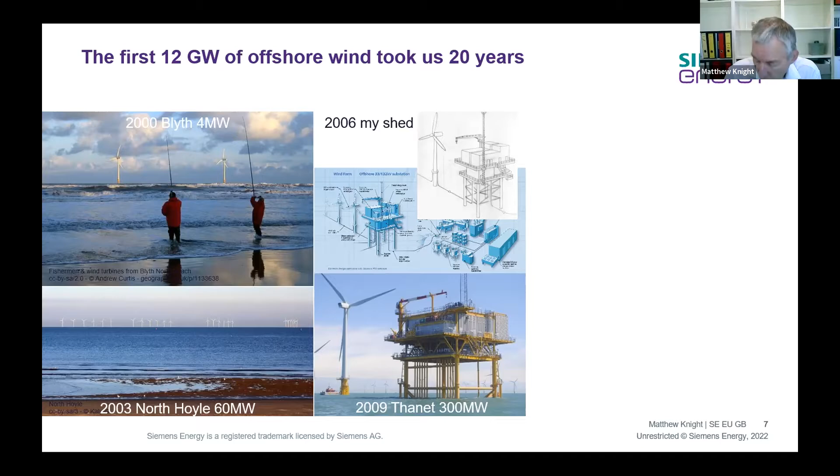But within 3 years, we started to build them, and somebody conveniently took this photograph from nearly the same angle. The industry's come a long way since then. We've built a lot more substations and a lot more wind farms. And I'm particularly pleased with this image here, which shows not 1, but 5 substations under construction at the same time in the same shipyard for 2 different projects, 2 for Triton Knoll and 3 for Moray East. And as you can see, the scale of Moray East means that we're now into gigawatt scale offshore wind farms.

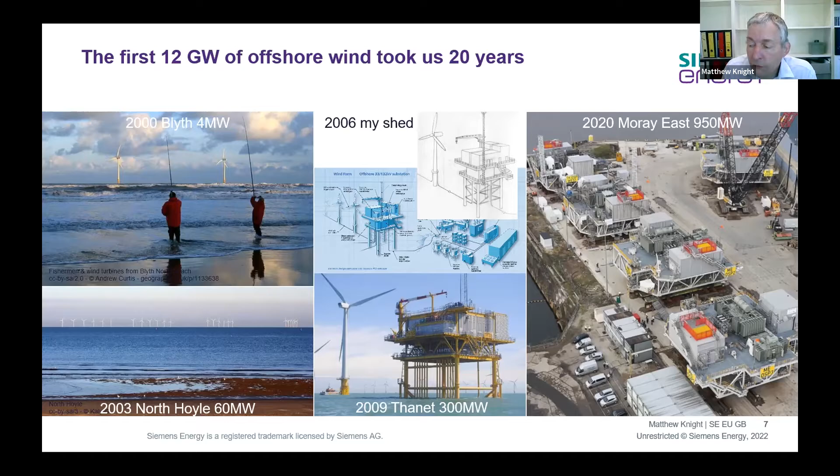So while we were building the wind farms, we were also building the industry that's going to deliver at the scale that we need to do these things. The substations got smaller and cheaper, and we built more of them. And we learned lessons, and a lot of new people joined the industry. There was a report earlier this week that shows 31,000 people now work in the British offshore wind industry. And that number is expected to rise to 100,000 by 2030. So in that context, the idea of doing 4 times as much in half the time as we've done already to hit that 2030 target begins to sound a little more achievable.

And it depends on supply chains for everything. And I was lucky enough that the best day of my working life was the day that I was the face of Siemens Energy when we announced that we were going to open the blade factory in Hull to make wind turbine blades for offshore wind farms. If you ever get the chance to go to a city and announce 1,000 jobs, I can really recommend it.

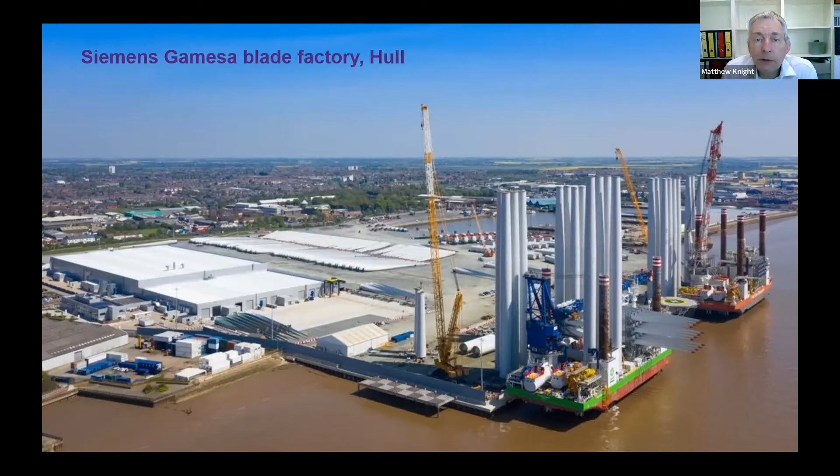But making investments like that required confidence that there was going to be a pipeline of work. And that involved a strong collaboration between government, between our customers and Siemens, or now Siemens Gamesa, in order to make that investment happen. And similar kinds of things have to happen in every part of the supply chain. But there are investments that pay off. This is a photograph from last month showing that we're now doubling the size of that factory so that it can manufacture even larger blades and support the growth of the offshore wind industry.

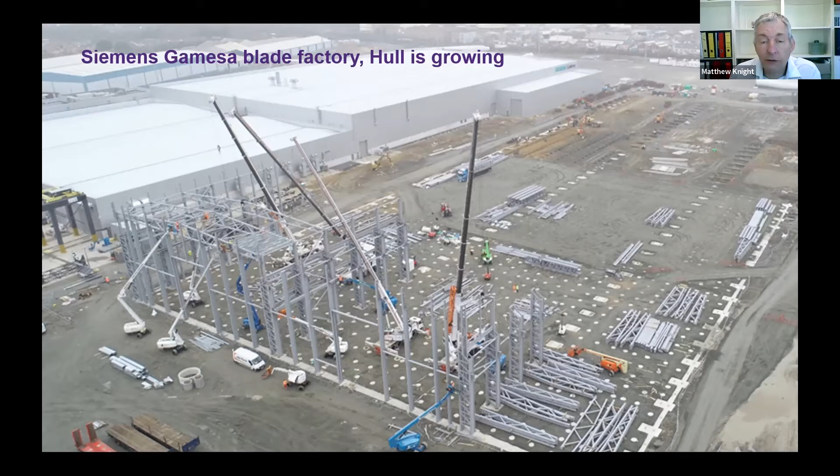We also need to double the size of our electricity system, and we need to invent whole new industries of a similar scale for carbon capture and storage and hydrogen production. And we need to do massive things for domestic heating. And all of those industries will need their supply chains, and they'll all need to grow in parallel at the same time. And that's what the energy transition is all about.

dispatchable generation. And there are 3 basic ways that you can deliver dispatchable electricity generation. If you start with a fossil fuel, you either have to clean up the emissions on the back end of your generator, or you can treat the fuel before you put it into the generator, capture the carbon dioxide, and make a fuel like hydrogen or hydrogen-based synthetic fuel. Or you can avoid the fossil fuel altogether, and you can use even more of that renewable electricity and water to make hydrogen and hydrogen-based fuels and put that through gas turbines. So we're moving away from the idea that we were storing energy as lumps of coal or gas in reservoirs into a world where we have to make and then store and then convert the energy when we need it.

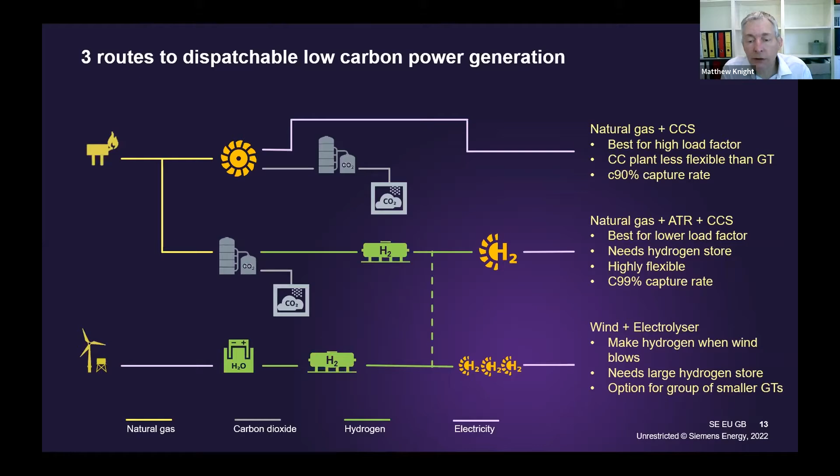And carbon capture and storage is absolutely essential if the UK is going to get to net zero. The Committee on Climate Change have said we just cannot deliver a net zero economy without large-scale carbon capture and storage. But it's not a trivial thing. It comes in big projects and it involves a lot of energy.

If you want to put carbon capture on the exhaust of a power station, you end up using somewhere between 5 and 10% of the electricity generated by that power station just to operate the capture plant, to capture about 90% of the carbon dioxide. And then you've got to bury that carbon, lock it away forever.

And if you can visualize trying to push a beach ball to the bottom of a swimming pool, that's the kind of thing that is involved in putting carbon dioxide at such high pressure that it might almost be liquid, a kilometre or more below the seabed. Excuse me.

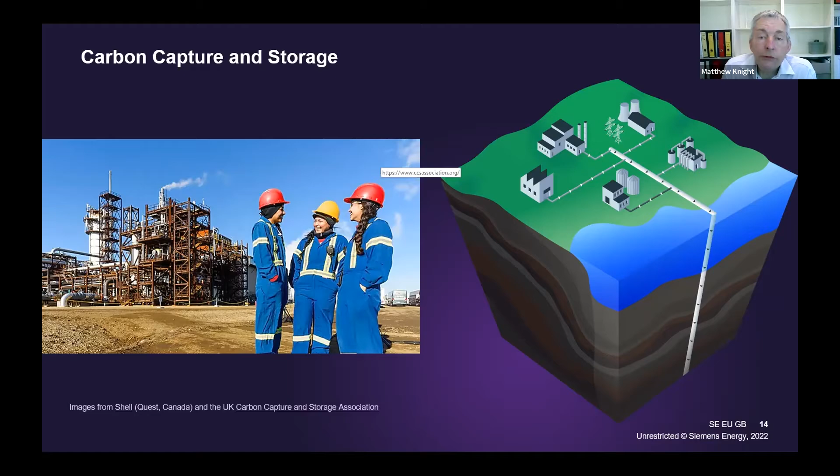But the UK has to do carbon capture and storage, and we are going to do it. And the first two carbon stores have been selected, one that will serve the Mersey area and one that will serve Teesside and the Humber. And there are 47 capture projects going into the first round of funding that will be putting carbon into those stores. And some of you might have seen that yesterday a new round of carbon storage was announced.

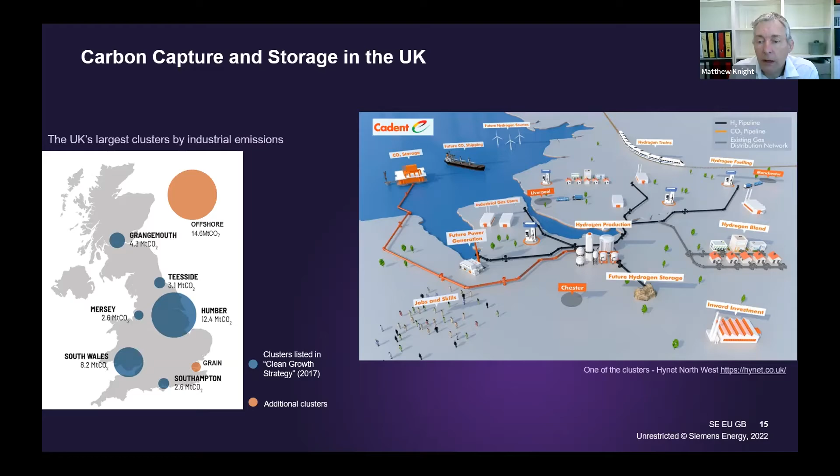So we're going to be burying carbon dioxide, and we're going to be using some of that to make large quantities of hydrogen. And we will need large quantities of hydrogen. This is a 9000 HL, which is a large gas turbine. We've just commissioned one at Keadby 2, which is an SSE power station on the banks of the River Humber. Keadby is the most efficient power station in Europe, and it runs on natural gas.

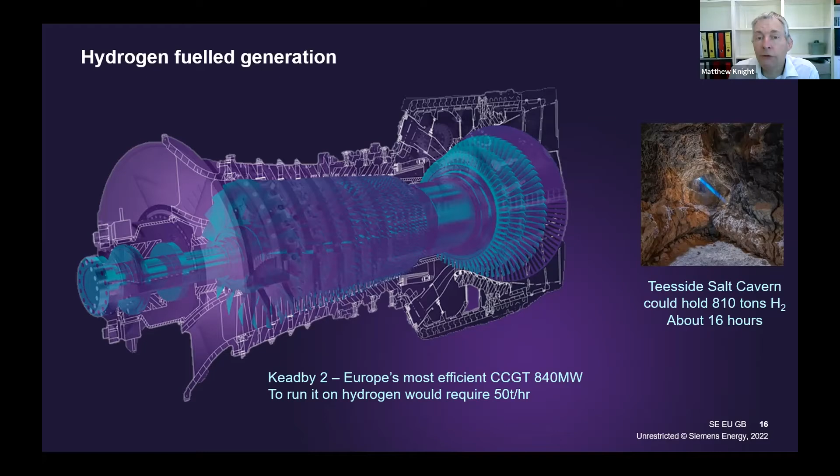If we wanted to run it on hydrogen, we would need about 50 tons of hydrogen every hour. And 50 tons of hydrogen, if you filled one of the salt caverns on Teesside with hydrogen, you'd be able to run this gas turbine for about 2/3 of a day. And that turbine is capable of producing maybe 1% of the electricity that we're going to be requiring in our net zero electricity system by the middle of the next decade. So you can see we're going to need a lot of hydrogen and a lot of dispatchable power.

We can make hydrogen in two different ways, and they're colloquially called blue hydrogen and green hydrogen. And although the product is similar, it's low carbon hydrogen, really they're two almost completely separate industries. Blue hydrogen is much more like the nuclear industry, whereas green hydrogen is more like the solar industry. Blue hydrogen comes in large autothermal reformers, big chemical plants. It needs to be attached to a carbon store, and it produces in bulk and is going to be located very close to where it's needed.

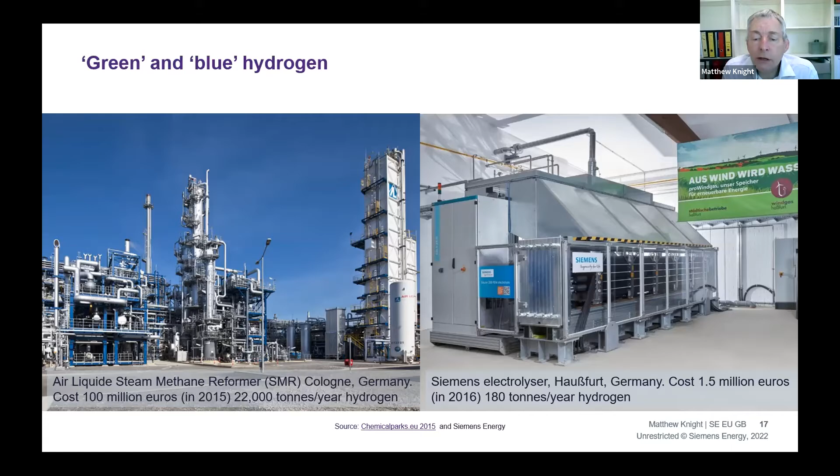Whereas electrolyzers these days are about 1 megawatt, but they're rising, and we'll see those get larger, and they can be spread all over the place, and they can be built relatively quickly. And that's important because the green hydrogen industry needs to grow by about 4 orders of magnitude this decade. So it's not 4 times, that's 4 orders of magnitude, 10,000 times. But we think we can do it.

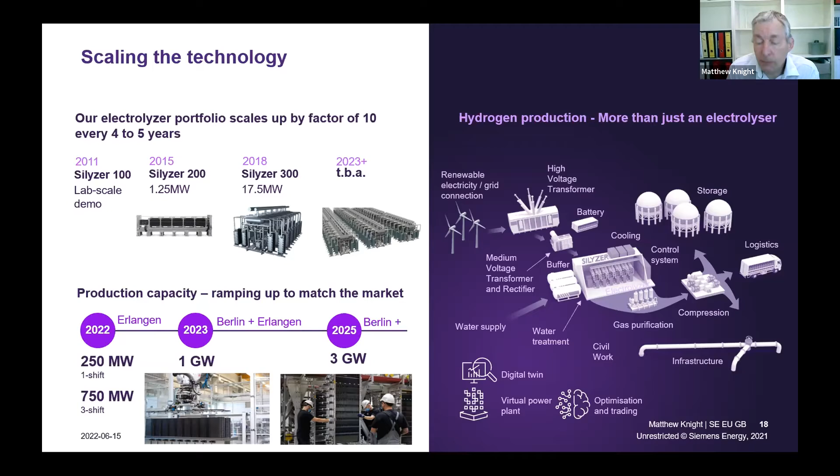The scale of the electrolyzers that we make in Siemens Energy has gone up by a factor of 10 every 4 or 5 years. Our production capacity this year was 250 megawatts. By 2025, it's going to be 3 gigawatts a year. And there's a whole range of other things alongside the electrolyzers, compressors, water treatment, and the electrical infrastructure that goes with that also needs to ramp up as well. And we're starting to see larger and larger projects.

Now, I've hit you with a lot of different technologies there, and often the advocates of one particular technology tend to talk about it like a silver bullet, or the press like to set one technology against another. So, will it be green hydrogen or blue hydrogen? Will it be hydrogen or heat pumps? Will it be nuclear or carbon capture and storage? If we're going to deliver a net zero electricity system by 2035 and a net zero economy by 2050, we're going to have to do all of them at scale, and we need to start very quickly.

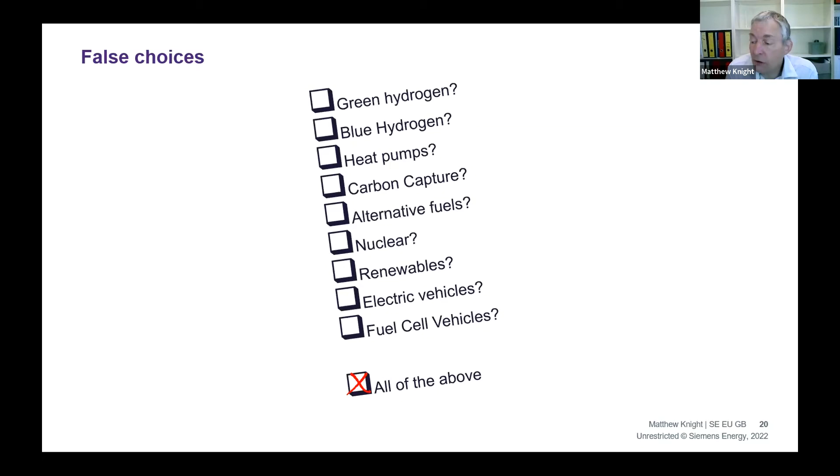Now, if that sounds too big and too scary, and maybe you can't see how it applies to you, here's a little hierarchy that you can use when you're looking at your own business and your own line of work. How can you contribute to meeting these targets? And the first thing to do is to stop adding to the problem. It's verging on the criminal to be building something today that you've got to decarbonize in a few years' time. So we need to start putting in things that are ready for decarbonisation, even if they're not operating in a low carbon way today.

Energy efficiency is really vital. Using less doesn't get us to net zero, but it does buy us a lot more time. What matters to the planet is the total amount of carbon dioxide and greenhouse gas that we emit. So getting our energy in a more efficient way is a really important thing that we can start doing, and in many cases we can do quite quickly and quite cheaply.

We know that switching to renewable electricity is going to decarbonize our electricity system, and whatever we can, we want to transfer onto electricity. But where we can't do that, can we substitute fossil fuels with clean alternative chemical fuels, low carbon hydrogen? When we've done all of that, maybe we still need to capture some of the emissions coming out of the back end.

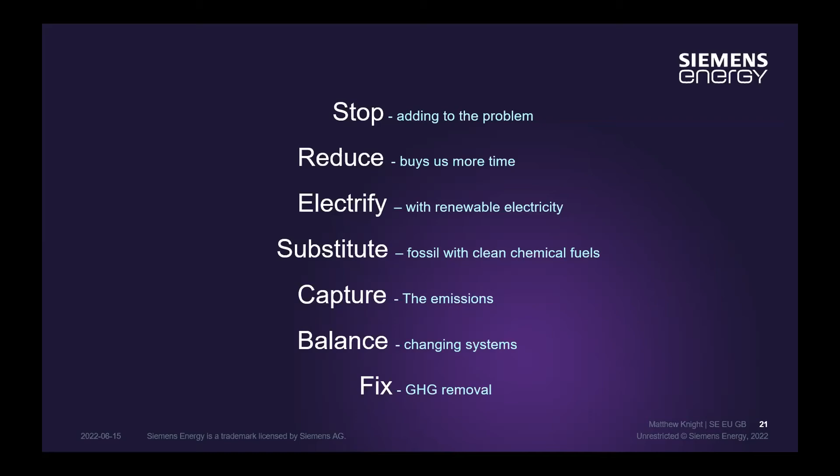If you're lucky enough to be in one of the industrial clusters, you will be able, by the end of this decade, to export carbon dioxide for burial as part of cleaning up your process. Because the energy is going to be in different places, and Paul showed us the boundaries, we're going to need to balance the system differently, and that's going to require energy storage, and it's going to require things like rotating grid stabilizers and flexible AC transmission systems.

And even when we've done all of that, I heard Professor Sir David King, the UK's former climate envoy, speak to a Siemens Energy audience last week. And he said something quite powerful. We are already nudging up against 1.5 degrees of warming. And greenhouse gas that's in the atmosphere goes on warming for many, many years once it's up there.

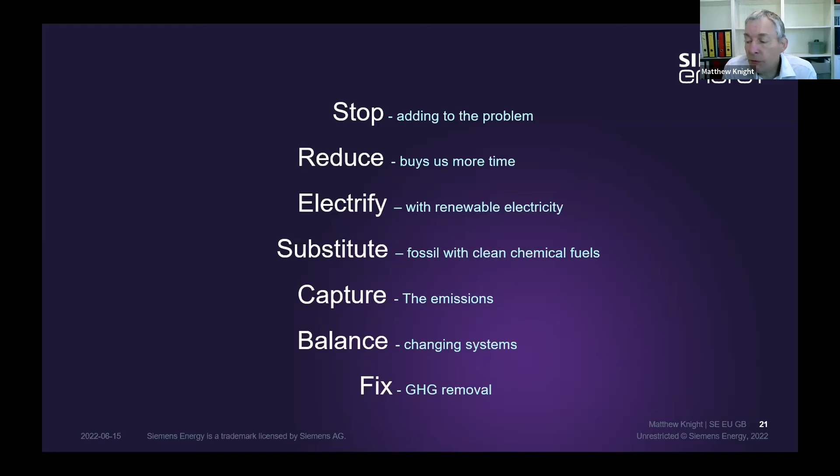So if we want to stay below 1.5 degrees, every kilogram of carbon dioxide that we emit from now onwards, somebody is going to have to suck that back out of the atmosphere over the next 50 years or so. So we need to get into greenhouse gas removal, and whether that's removing methane from old mine shafts or whether it's carbon capture and storage, we're going to have to reverse the damage that we've done. And there's a whole load of policies that government have come up with to do all of those things, and I won't enumerate them.

If all of that sounds just too scary, it's worth noting that when the conditions are right, change can happen very quickly. And I love this graph because it shows how we've switched off coal in the British electricity system. In 2012, 45% of our electricity generation came from burning coal. In 2017, we had the first day with no coal generation at all since Queen Victoria was on the throne.

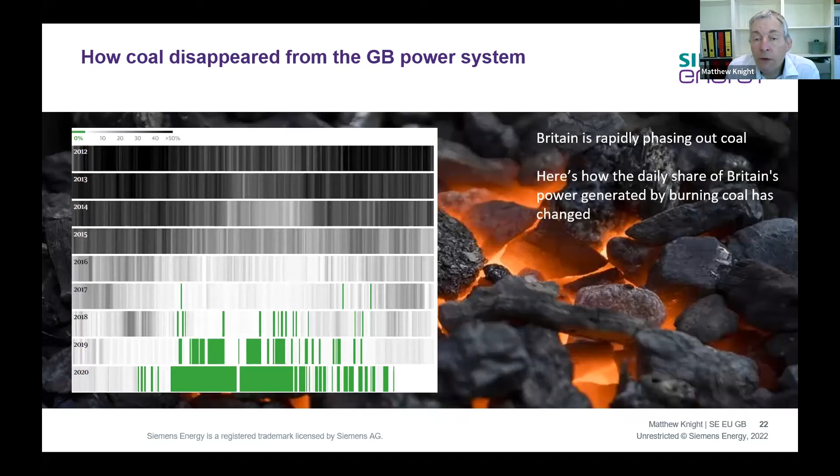And as you can see by the amount of green at the bottom of the graph, in the last couple of years, there's been very little coal generation at all. So when the conditions are right, change can happen quickly. And the next change is we need to switch off the natural gas, especially for heating, but we also need to find different ways of doing dispatchable power generation that don't involve unabated burning of natural gas.

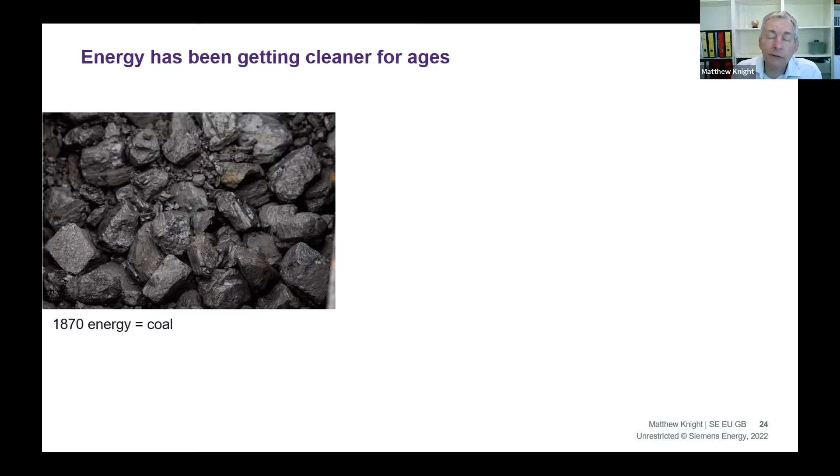So this energy transition is really just a speeded up version of a trend that's been happening for centuries. Back in 1870, if you talked about energy in Britain, energy was coal. It was used for heat and it was used for power. But it was dirty and smutty and it discoloured our buildings. And so people worked out that you could process coal to make coal gas, town gas, and that started to be delivered through pipes. And it was a cleaner version of energy.

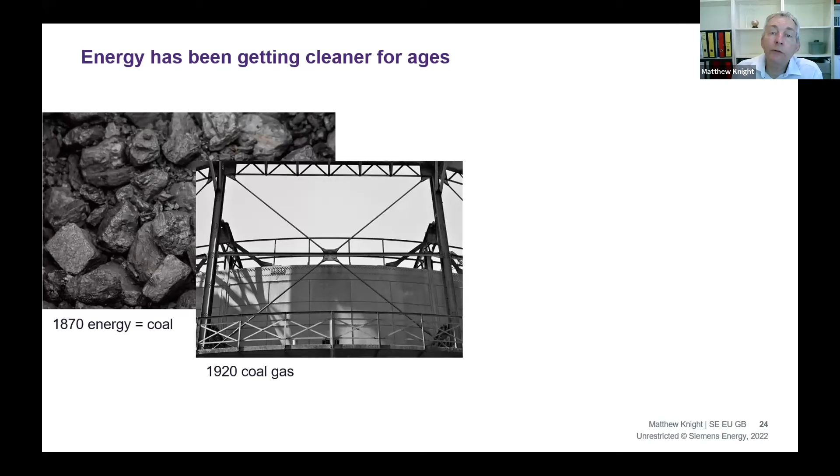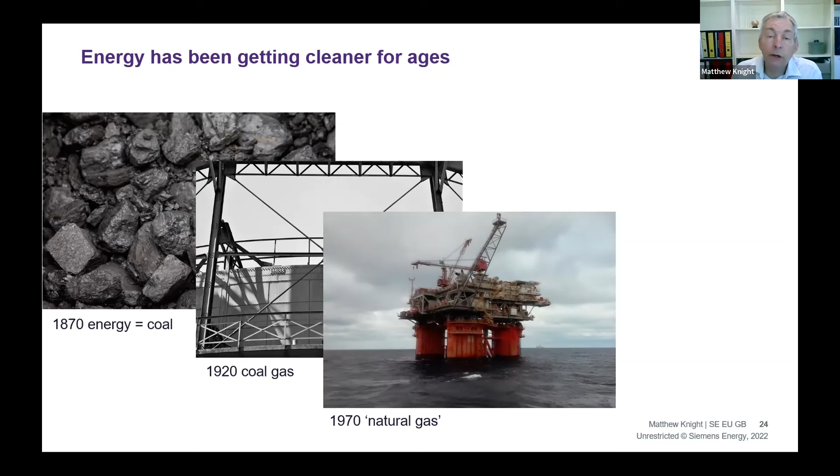And if you find that trend worrying, it's maybe to do with the way you think about your job. If you think of yourself as working in the oil and gas industry, you're linking your purpose in life to a fossil fuel, to a commodity. But if you think of yourself as working in the bringing energy to people industry, that's a really noble, important thing to do that needs to go on happening for many years to come.

If you're in the bringing energy to people industry, there's just one extra constraint. We just have to do that in a net zero way. So it's possible to be in the energy industry and look forward and see the very exciting opportunities that are happening with growth happening in the gaps between the old industry.

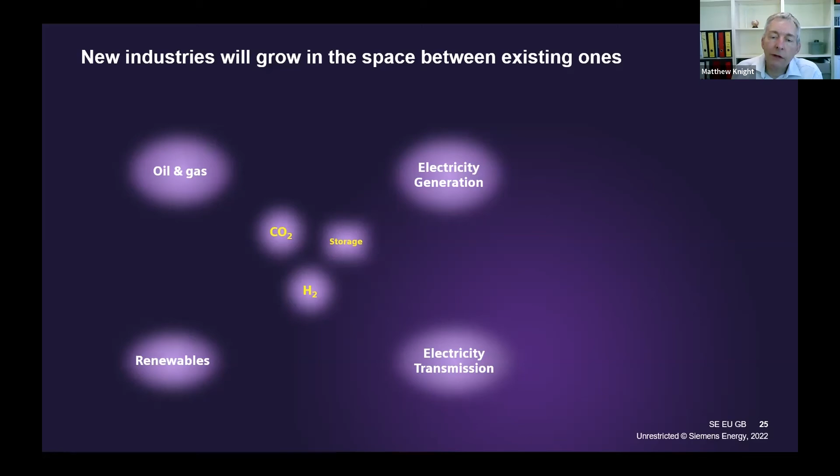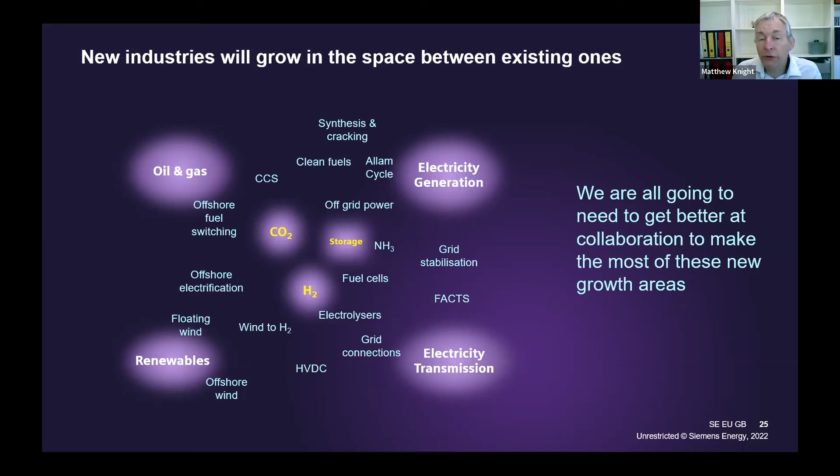Handling carbon dioxide, making and using hydrogen, energy storage. These are the things that start to couple together the historically separate sectors of oil and gas, renewables, electricity transmission. And they are spawning a whole load of new industries. And those industries require skills that are a hybrid of what came before, which means that we're going to need to learn new things and we're going to need to collaborate in different ways in order to deliver this net zero world. And if that's not a great opportunity for the rest of your working life, I don't know what is. And it's going to happen.

Businesses all over the world are now committing themselves to net zero. People are investing in this stuff. And why are they doing it? They're partly doing it to save the planet. We have to do that. But they're also doing it because the legislation and the regulation is in place. They're doing it because the investors are demanding it. By 2025, over half of all of the money that's invested on this planet will be in ESG funds with strong environmental requirements on where that money goes.

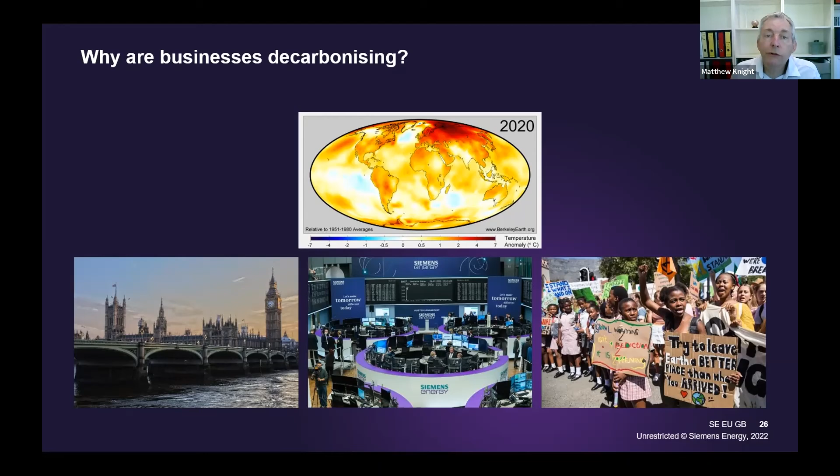But lastly, the main reason why we need to do this is we are the generation that has to do it. Our children and our grandchildren will demand that we do it. We need to step up and we need to transform our energy system, and we need to do it quickly because we have fewer than 1 billion seconds left to deliver net zero.